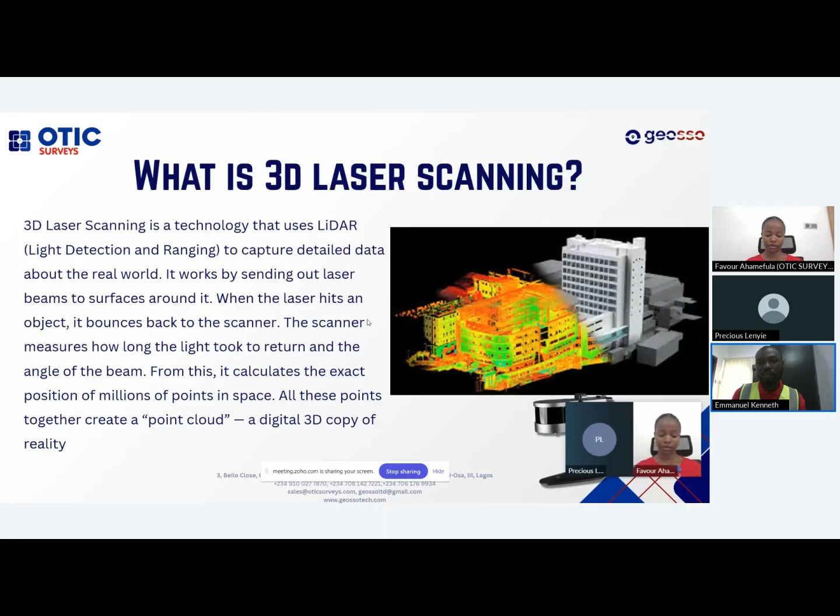So why are we bringing this to surveyors and engineers? Why are we saying surveyors, engineers, you need to jump in on this new technology? Because of, number one, speed. Laser scanning captures about 3,000 to 1 million points per second, depending on the capacity of your scanner. From 3,000 to 1 million points per second.

Imagine the amount of data in 1 million points. That means you can cover a site as big as 60,000 square meters in under 45 minutes, just by walking around and covering the distance that spans the whole area.

Number two, the accuracy. That's millimeter level accuracy, even when the structure is complex. If you scan and then take a tape or GNSS to measure it, you will be marveled at the accuracy. Scan a house, carry a tape, measure the distance from pillar to pillar, and you'll be amazed.

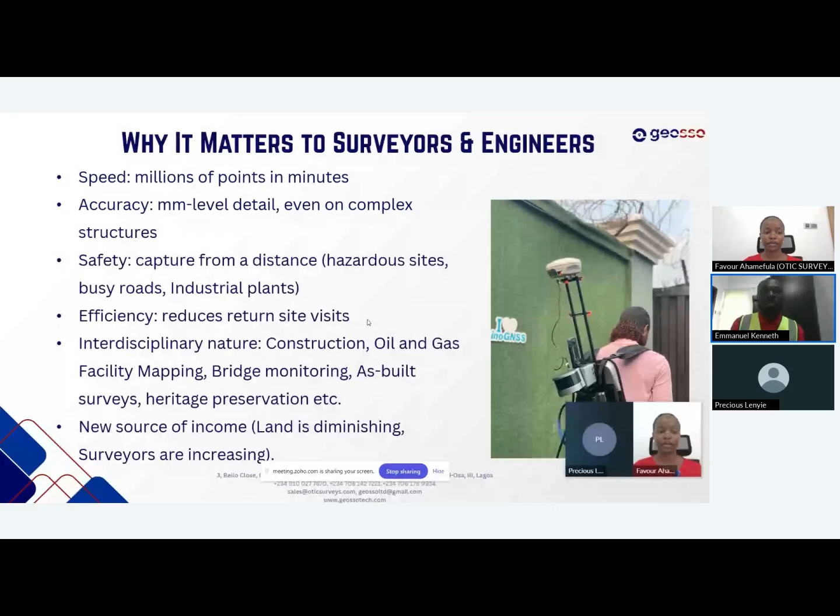Technology is bringing new and efficient ways to do surveying. So what do you use laser scanning for? In laser scanning, you can use it for surveying, engineering, infrastructure, heritage, oil and gas. In surveying, you can generate topographic maps from point cloud.

When you do topo with GNSS or total station, you interpolate it. Interpolation means creating enough point cloud data to see the topography, to calculate the topography of the soil or the environment of the site. But with laser scanning, you don't need to do interpolation. You just generate a DSM, generate a DTM, directly from the point cloud.

You can also use the point cloud to do cadastral survey, mapping out the boundary of the site. You can do as-built surveys, checking there's a building here, mapping it, detailing the building, and mapping out the perimeter.

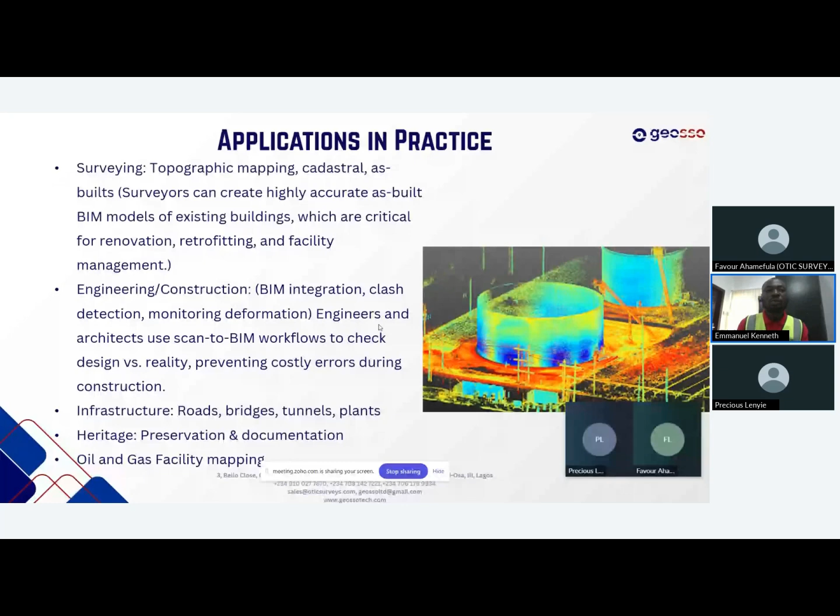So in hotels, you can use it to create a digital twin that you will use for maintenance and renovation. You can use it to incorporate smart technologies, because it gives you accurate scan data, spatial data. And in gas facilities, you will improve safety and asset management with precise 3D mapping. You'll be able to plan expansions with reduced downtime.

In deformation monitoring, you will detect subtle shifts in structures, slopes, dams, and tunnels over time. It is essential for safety and early warning signs. So if you scan, let's say, a dam today, and you come back the next time and scan it and there's a crack, it will show. The crack may not be visible to your eyes, but as long as the laser scanner picked it up, you will see it and know the necessary step to take, whether it is to renovate or evacuate.

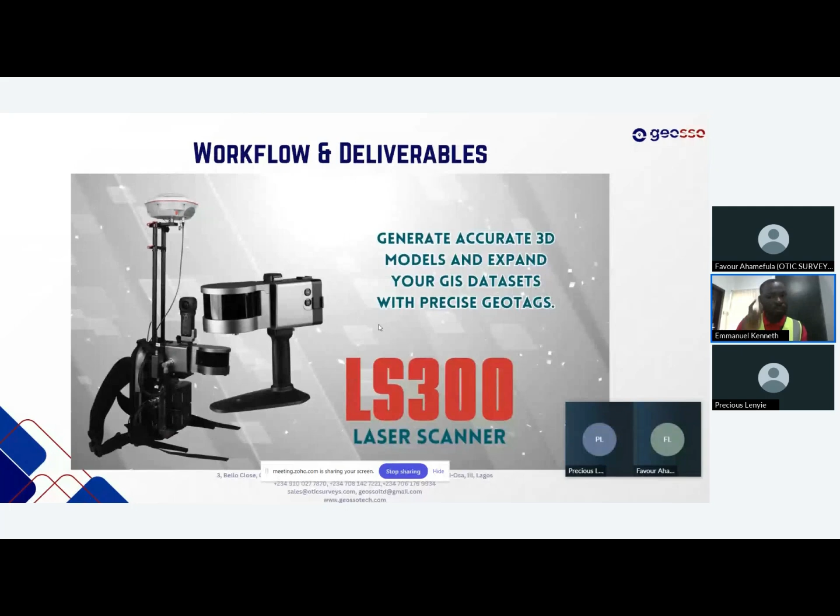I want you to take advantage of this opportunity for you to enter into laser scanning in surveying or engineering. What you need is the hardware, the software, and the training. Hardware is the laser scanner, the software is the software used to clean, register, compute, turn into model. What are the costs and what is the return on investment?

Now, the barrier: the field of laser scanning in Nigeria is still open, it's not crowded. In short, there are not even up to 5 people in Nigeria that do laser scanning at this moment, and not up to 5 companies that do laser scanning as at this moment. So the door is still open, before it becomes crowded. So you can start small.

You can first of all learn the software parts. Then you partner with people that have laser scanners, like OTIC Surveys. They scan, they give you the data. You use your hand to process it, model it, or you can rent.

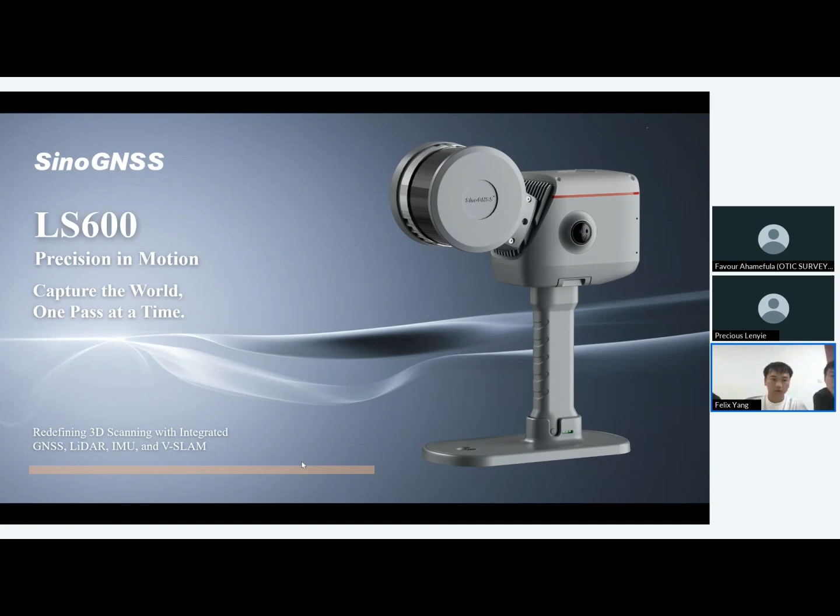The first part: what is SLAM? SLAM means simultaneous localization and mapping. It's one of the core technologies in fields such as robotics, autonomous driving, and AR/VR. It solves the problem of how a device can determine its own position when constructing a map of the surrounding environment in an unknown setting.

Similar to how humans, when in an unfamiliar city, judge their location by observing buildings, road signs, environmental features, and at the same time mentally draw a simple map.

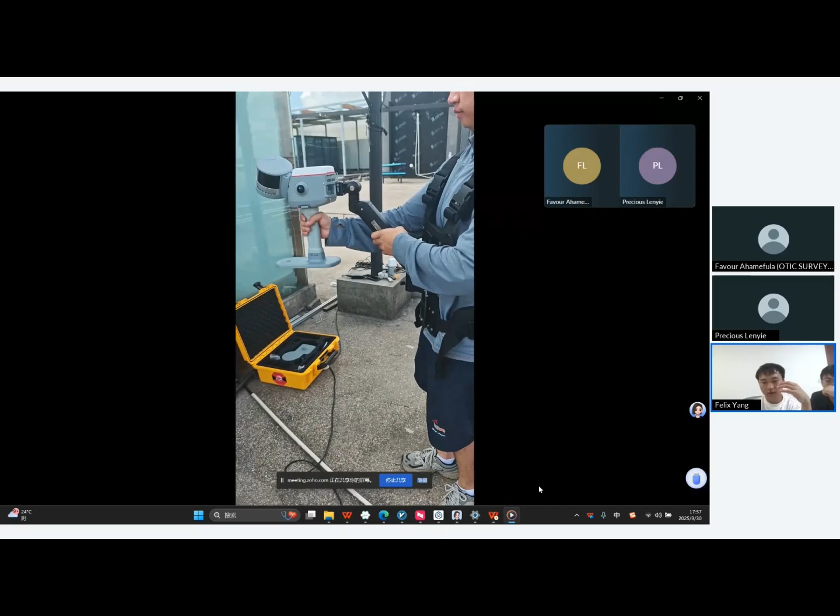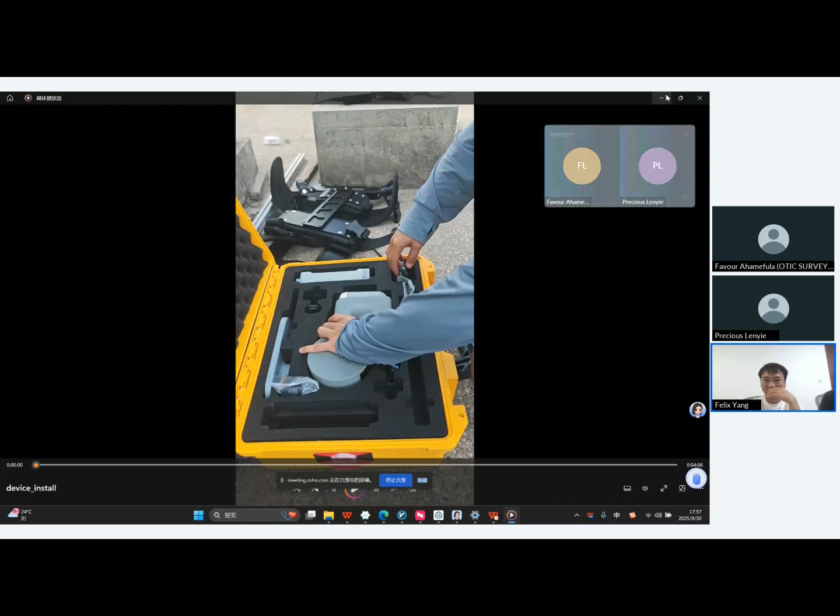Step 2, we need to connect the software. Step 1, search Bluetooth number, check this device list. And step 2, configure network password. Okay, I will show you another video.

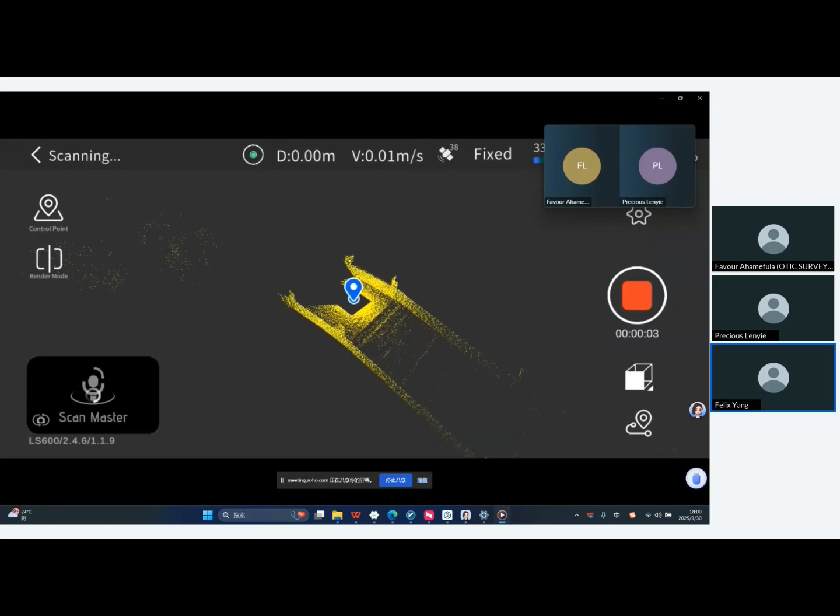Okay, you can see it. After initialization, we can start work, and this screen will show your point cloud. Fine.

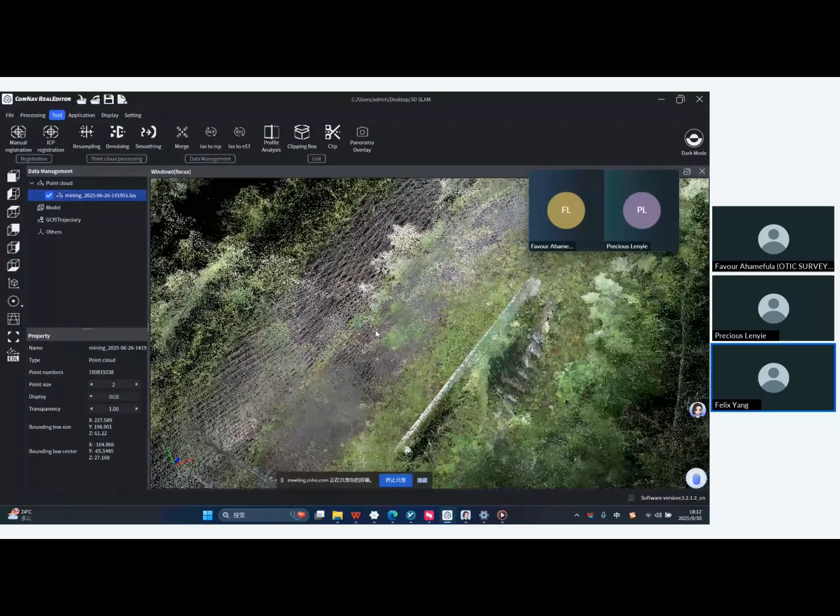Now you could see my screen. Now we can see the mining tunnel. And now we can see the point cloud. Now using this software, we could

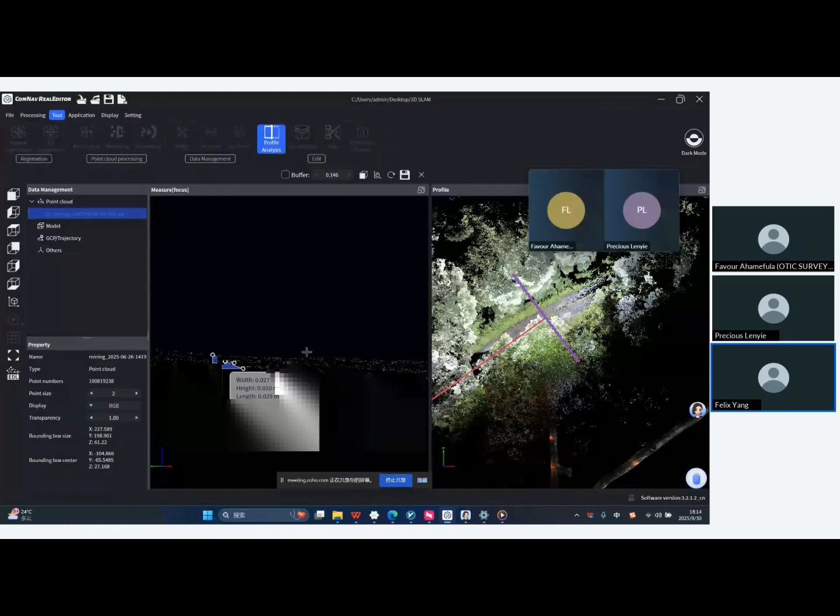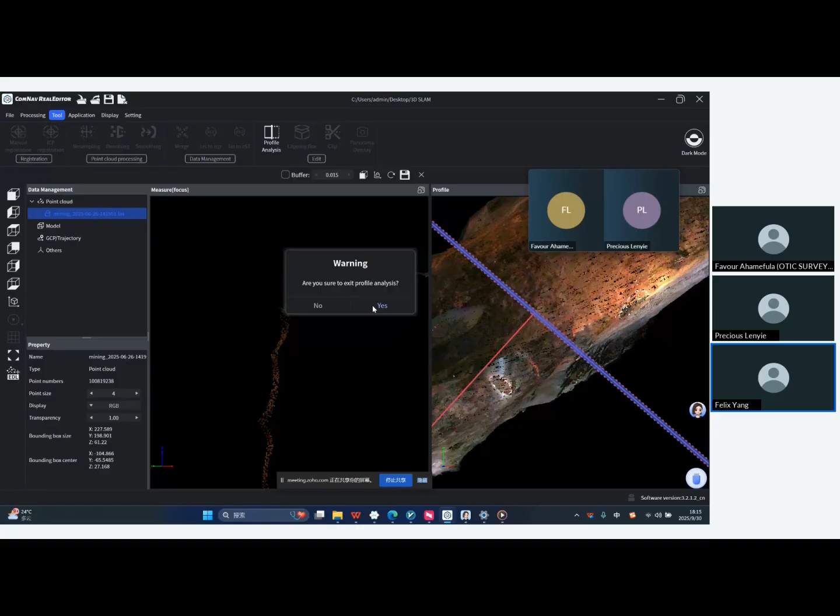And we can view it. Okay, we can get this. Yes, by using these tools, we can have a side look of the point cloud we collected, and we can measure the distance between the different points we collected. Application: the mesh function. We can change the point cloud to an OBJ mesh model or OSGB.

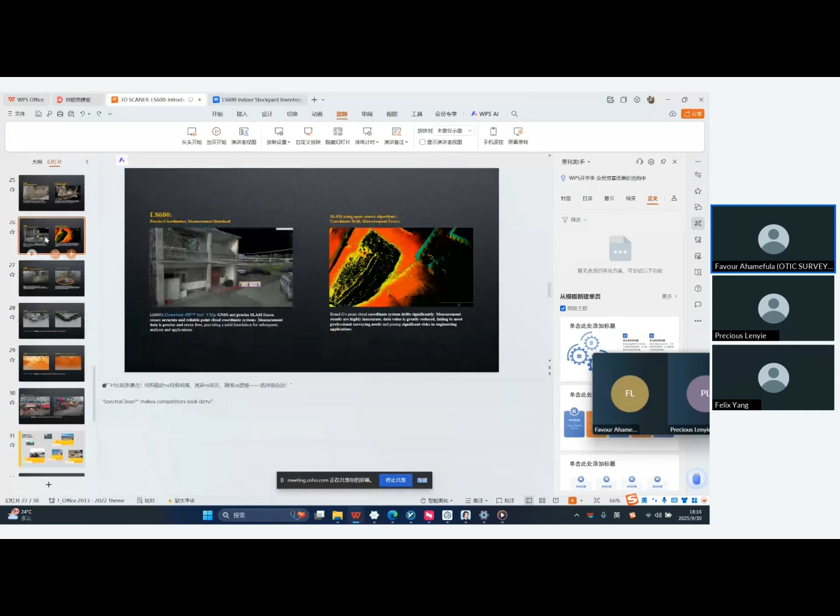Mr. Yang. Okay, can you hear me? Yes. Okay. Please, you don't have to go through the entire software process. You can just go through the slides you sent me and elaborate on them. We have surveyors and some of them have to return to site, so we wouldn't want to keep them long. Okay, so we just go on with our PowerPoint. Okay, your PowerPoint, please. Thank you so much. You're welcome.

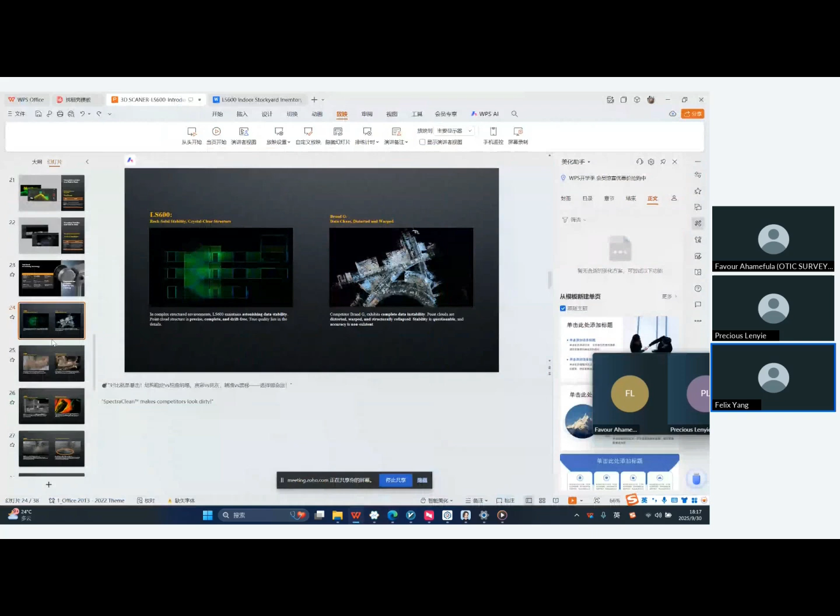So can you see the slide? Yes, but can you make it full screen? Okay. We continue our presentation. Okay, yes, thank you. Don't worry.

Okay, so our product addresses core industry pain points. The first one is time-consuming post-processing. Some devices may cost a lot of time in post-processing, and our product can easily do the processing procedure. The second pain point is inconsistent GNSS signals. And the next one is limited color fidelity.

Over 60% of scanning projects face costly rework due to incomplete data. LS600 eliminates this. Second, we counter GNSS challenges, delivering centimeter-level accuracy even in urban canyons and forests, powered by SinoGNSS RTK. We have our own RTK products, so with our upgraded technology we can easily handle these challenges.

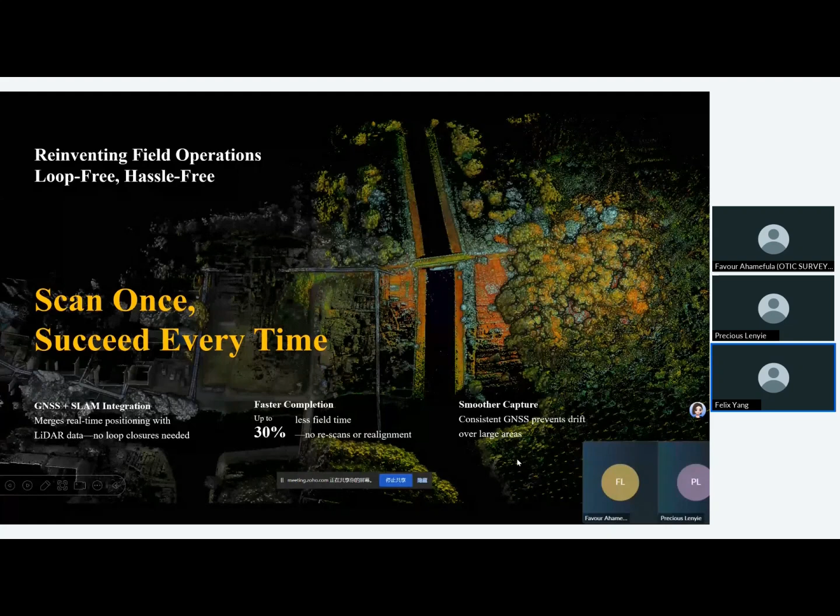Consistent GNSS prevents drift over large areas. On-the-fly georeferencing produces a georeferenced point cloud instantly, as we showed in the software. Live coverage feedback lets you see scanned areas in real time and adjust to avoid gaps, and adaptive scanning minimizes overlap and ensures full coverage in fewer passes.

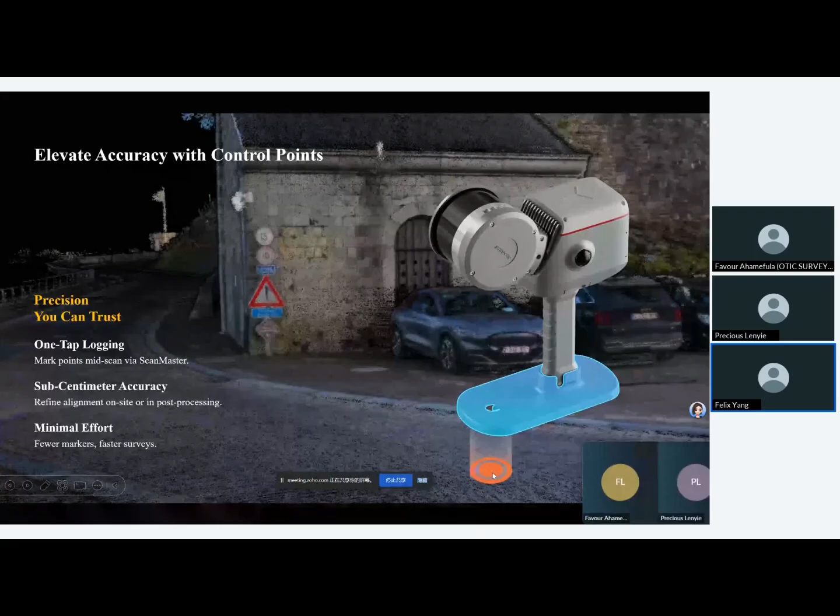Okay, so this is the product. So the first part is the real-time SLAM. It minimizes drift, ensures stability, and inside the device, it has our SinoGNSS RTK and rapid signal reacquisition in tough areas. So with the technology of our RTK products, it can easily help SLAM. And the camera on the side of the device enhances alignment and color fidelity.

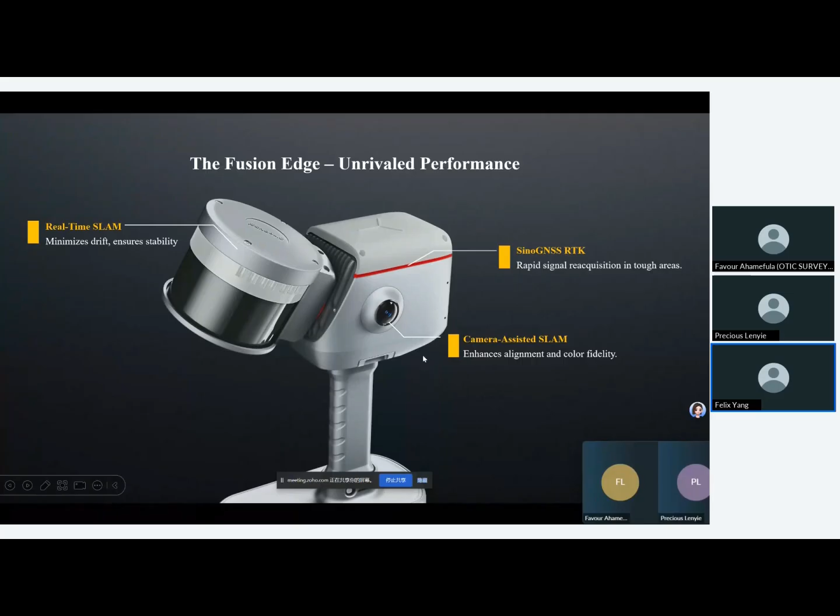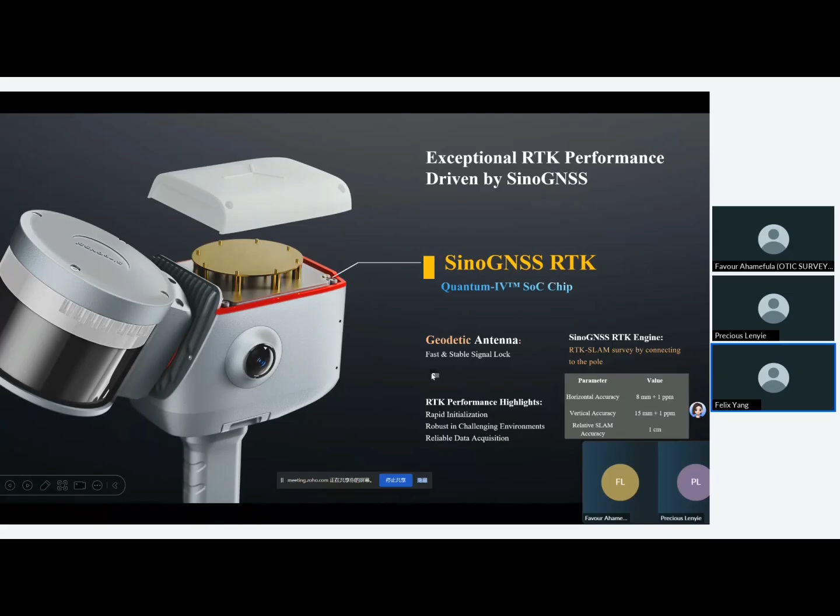You can see our self-developed SoC chips and a geodetic antenna, fast and stable signal lock. This is the SpectraFusion V-SLAM imaging system. So it enhances alignment and color fidelity. So V-SLAM enhanced the dual 48 million pixel cameras, elevating point cloud quality to new heights.

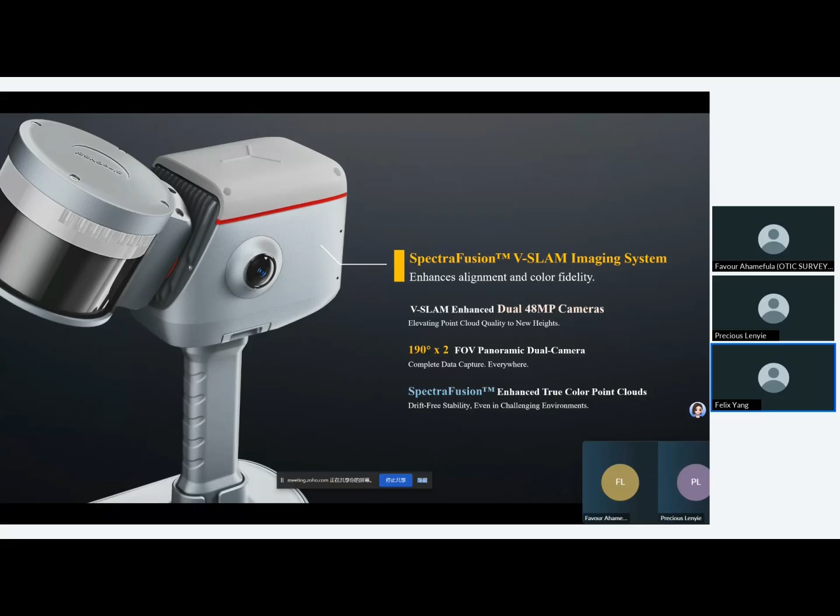And we have 190-degree multiple 2 FOV panoramic dual camera, complete data capture everywhere. So the device has an integrated handle design with 49 watt-hour EnduraCell battery. It integrated the batteries in the handle, and it has a 30 minutes fast charge up to 1.5 hours continuous operation, and it's easy to change the battery.

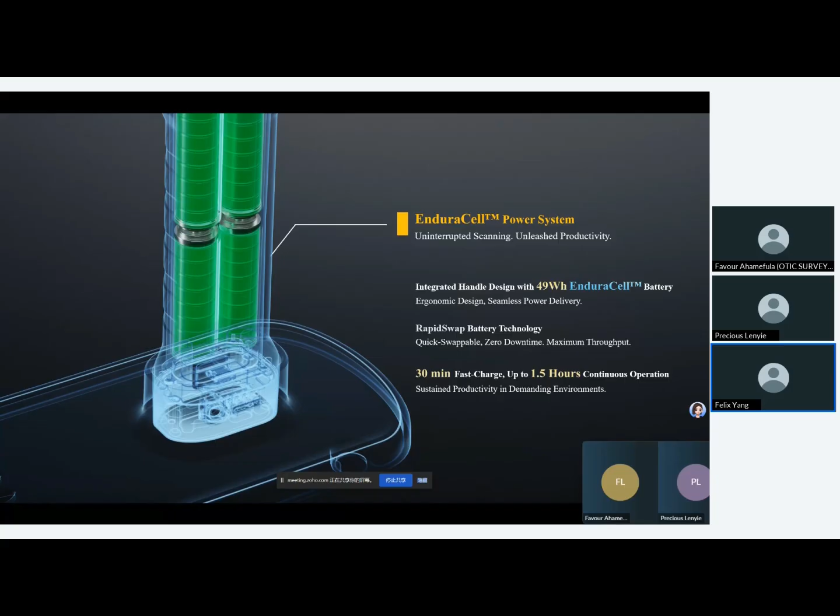Okay, so this is a whole introduction about the device, and the whole device is IP54 rating, and it's dust and water resistant for rugged use. And the GNSS stress test is stable in obstructed areas. The thermal endurance: it can be used in this environment from -20 degrees Celsius. It can be used from a very low temperature to high temperature.

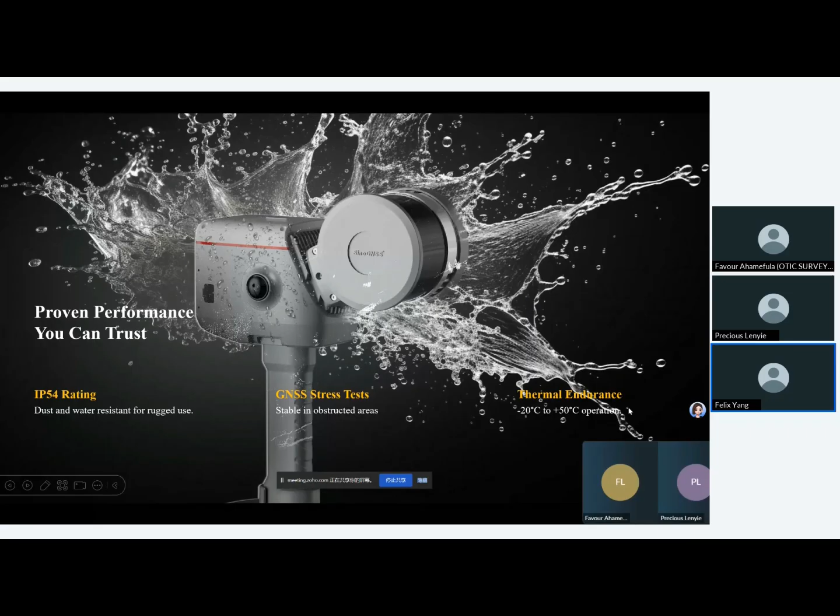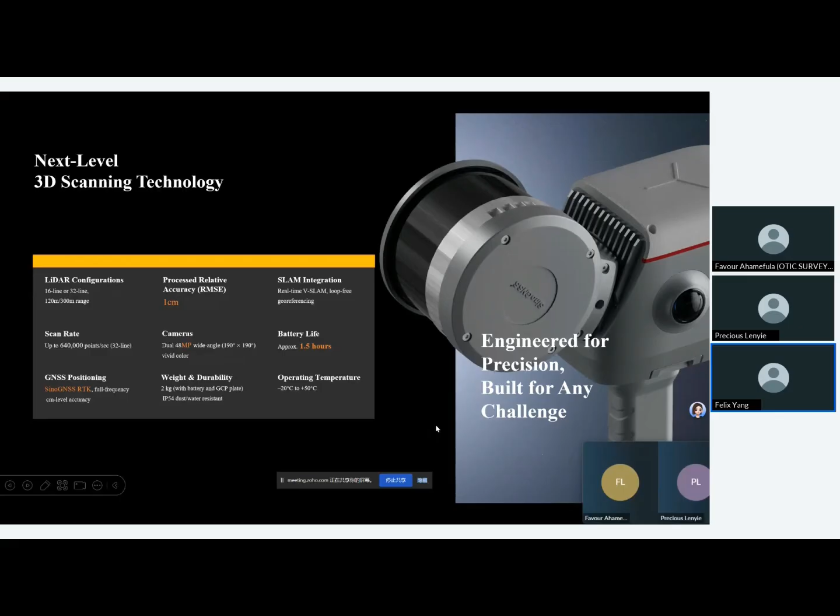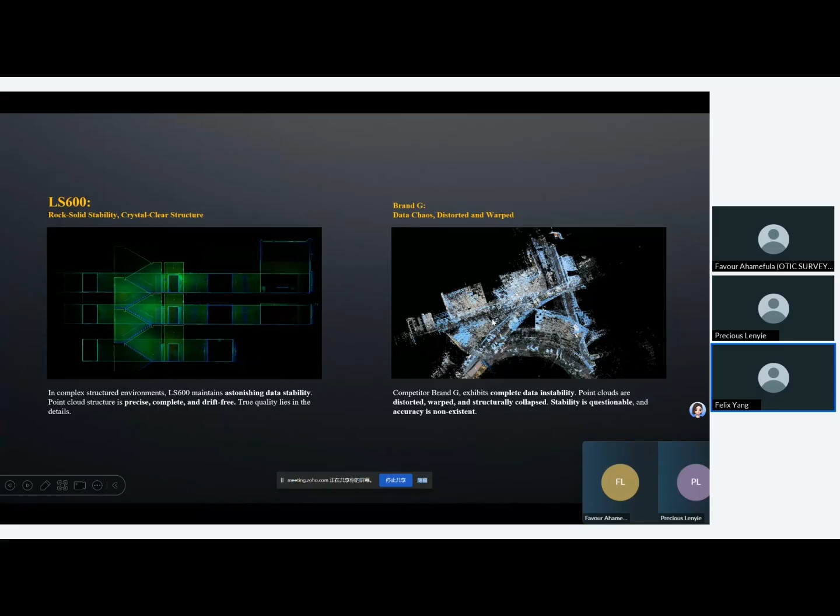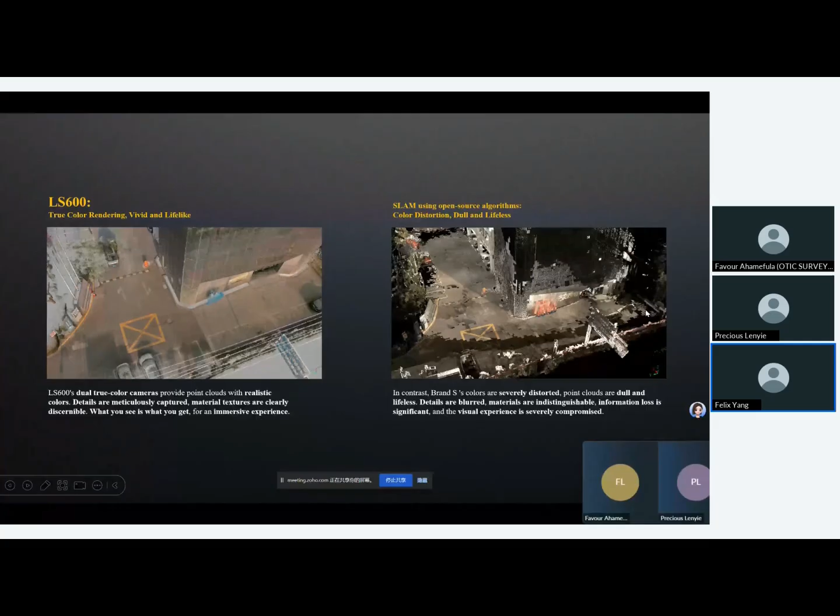This is a picture from another brand. You can have a contrast of the two pictures. So the first one is from our LS600, and the next one is from another brand. You can see the difference. Okay. Yes, from the two pictures, you can see the difference between our product and the other brand's product. Here is also the contrast between different brands. So the first one is our brand. This one also shows the difference between different brands.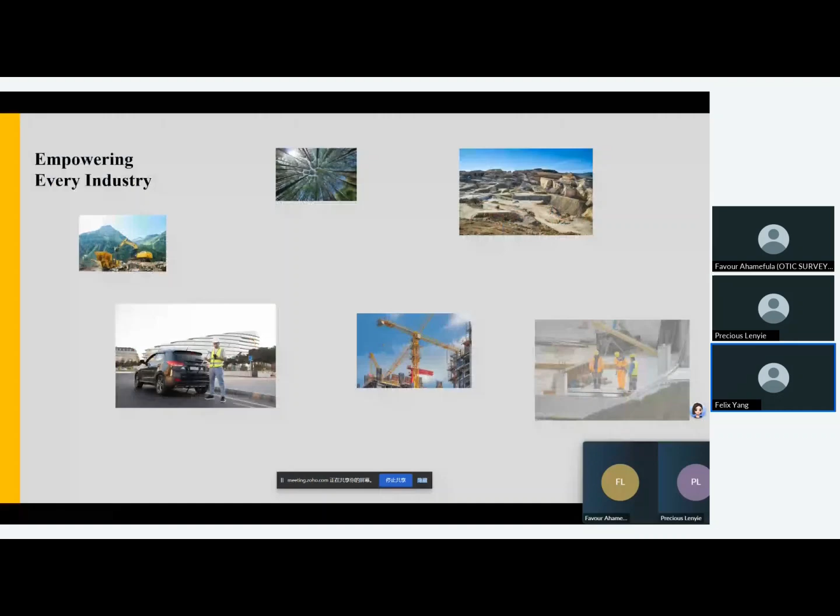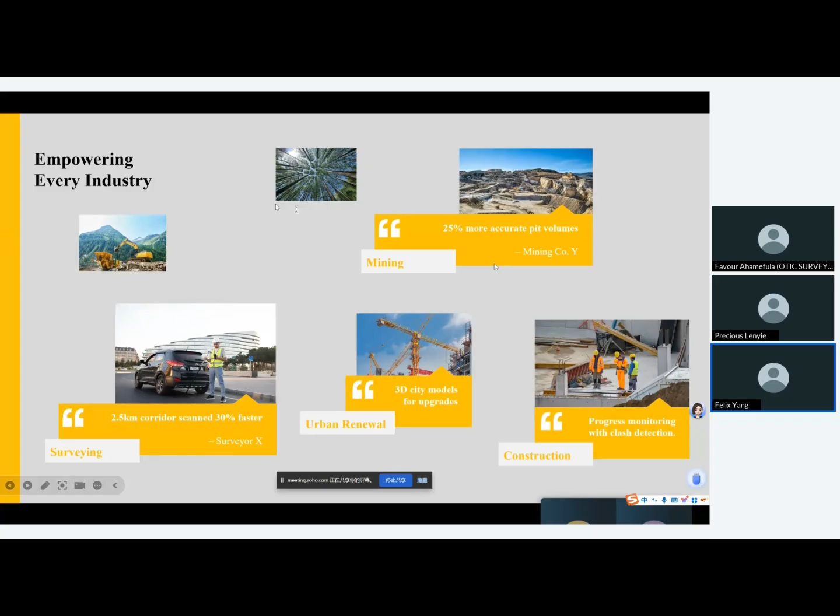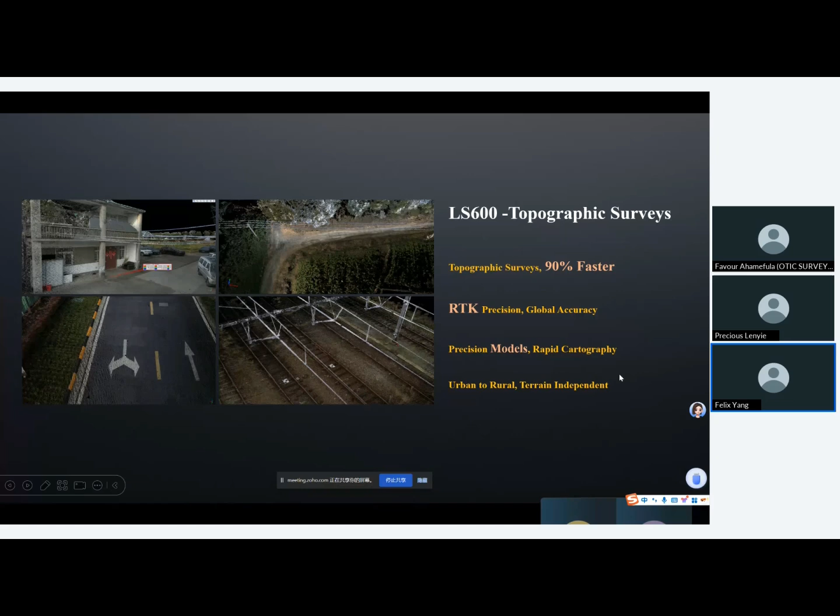So our device is empowering every industry, such as mining and urban renewal, like we use in infrastructure construction, surveying and construction. And maybe in some countries we scan the forest. That's the use in different industries. LS600 topographic survey, 90% faster, and with our self-developed technology, our RTK precision can reach global accuracy, and the precision models, rapid cartography, and urban to rural different areas, terrain independence.

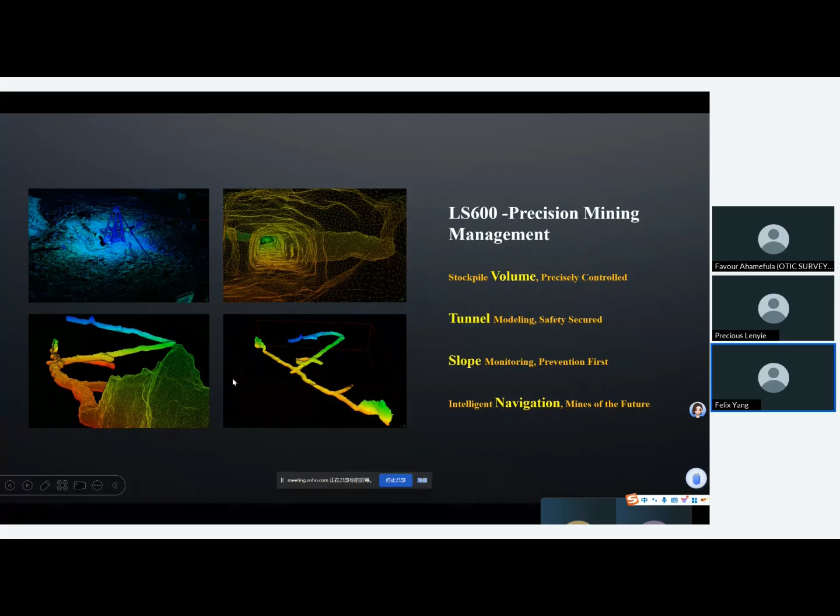So this is used in mining tunnels. LS600 precision mining management: stockpile volume, precisely controlled; tunnel modeling, safety secured; slope monitoring, prevention first; and intelligent navigation, mines of the future.